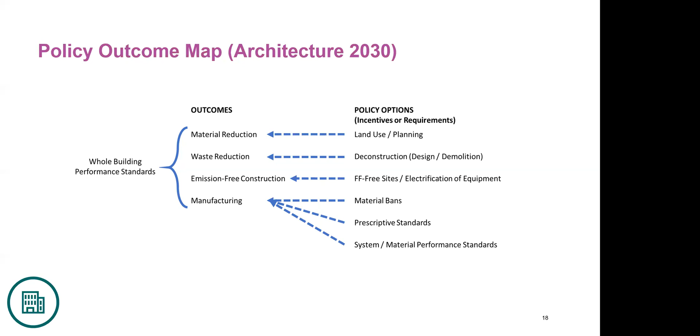And so these were basically the discussions happening on day one. And the morning of day two, Vince Martinez from Architecture 2030, who was there, had sketched out a policy map that listed, as you can see here, all the policy options that we had been discussing on the previous day, what kind of outcomes you can expect from different types of policies, and in the end, how they can all move towards a whole building performance standard. And I'm not going to go through this figure right now, and instead encourage you to look at it, and feel free to send any questions my way that you have on them.

We also had breakout discussions, because this is always crucial in the workshops that we do, so that the cities can actually discuss the issues that they are facing. So we had one session where we tried to look far ahead. So in the next 2 to 3 years, what can you accomplish? And what do we actually want to see be the end result in 10 years from now?

And then we sort of tightened the time horizon and said, okay, but to get to the next 2 or 3 years, or to get to that end target in 10 years, what can you do, what are your next steps for the next half year up to next 2 years to go citywide? Again, that means a lot of stakeholder mapping. Who do you need to involve in this work? And again, listing what you actually need to get it done.

We also had one group that we just called Vision 2050 that were discussing what it would actually take to get to zero. And in that group, there were more conversations around adaptive challenges. So is there a way that we can use the built environment that we have today in a different way than what we are using it today, to as much as possible avoid constructing new buildings?

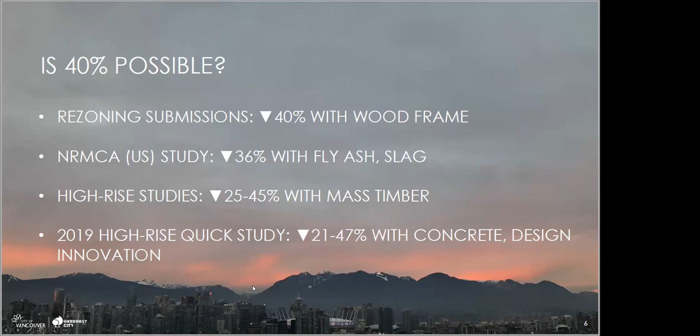Many assumptions go into these analyses, but these are some data points that give us a sense that 40% is possible today. We don't know what that costs, but that's what we need to find out. And so I won't go through this. There are other benefits, of course, co-benefits to reducing embodied emissions. And what do we do next? So as I mentioned, we know it's possible, but we don't know what it costs.

And so we need to set a target in our next rezoning policy that will come into effect 2021. We don't know what that target should be, whether it should be, say, a 5%, a 10%, 15% reduction. We don't know what prescriptive requirements should also sit alongside that whole building requirement, whether to protect sustainable sourcing or to protect against some of the more problematic material choices that you could be driven to, or even just, yes, you can meet your whole building target with some very carbon intensive materials, but why do that if they're not necessary? So maybe we can protect against some of those things.

So all to say, our next step is to do a study with industry on what that cost curve looks like to reducing embodied carbon. That'll allow us to go to our stakeholders and consult on the next step and say, you know, this is what it costs, this is what it doesn't cost, these are the barriers, this is what we're thinking for a first target.

And of course, we're also working to follow our provincial lead here and enable mass timber construction at a higher, up to 12 stories, and possibly some other measures as well that can kind of support or unlock the ability to build out of mass timber.

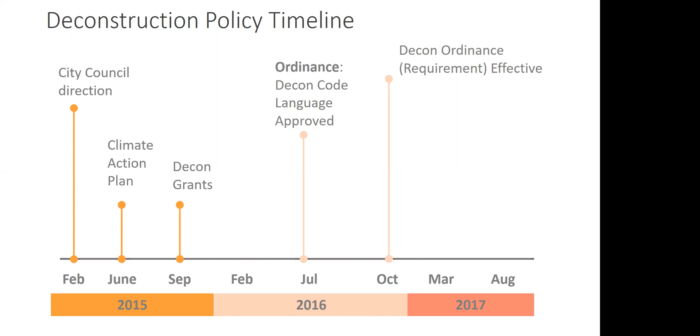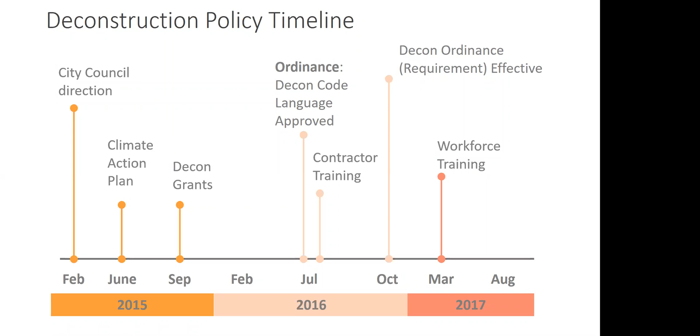In July 2016, Portland passed an ordinance to require deconstruction, and the policy went into effect just 3 months later in October of 2016. Now, this policy didn't just pop up out of the blue. You know, the city had been working on building capacity towards it for years. In 2015, City Council provided direction that they wanted to see this happen. They then integrated this action into their climate action plan at the city level and started giving grants to help incentivize projects. Along the way, the city and other partners like Oregon DEQ supported workforce development to help ensure that the policy would actually be effective when implemented. Now, the ordinance itself says that deconstruction is required if the structure is a detached home or duplex built in 1916 or earlier, or is a designated historic resource.

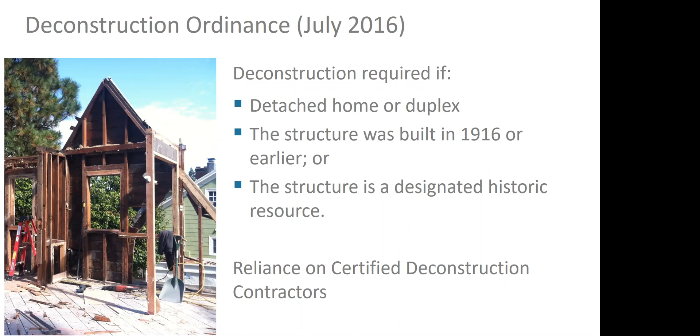The threshold of 1916 or earlier was chosen because it represents about 1/3 of all house demolitions in Portland in the years leading up to the ordinance. This was a significant portion of overall house and duplex demolitions. However, it was right-sized in terms of what the industry could successfully take on. Too little, and we're not really advancing the industry. Too much, and we overwhelm the industry.

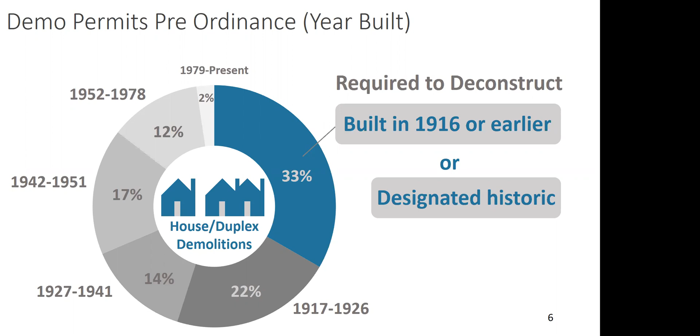So let's talk about the outcomes of this policy. Ensuring we had enough companies and trained and certified workers to do the work was really critical for the launch. So there were a bunch of different trainings offered to get people ready to enter the workforce. And the workforce trainings prioritized participation by women, people of color, and other disadvantaged groups.

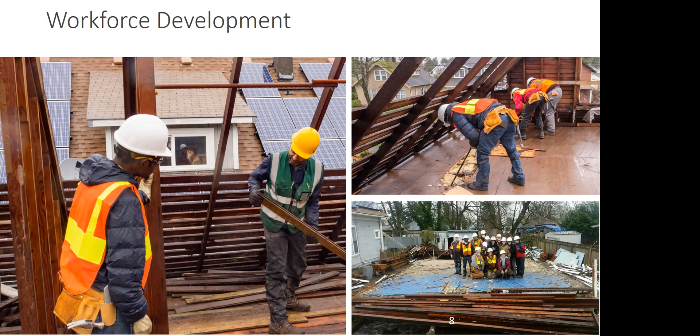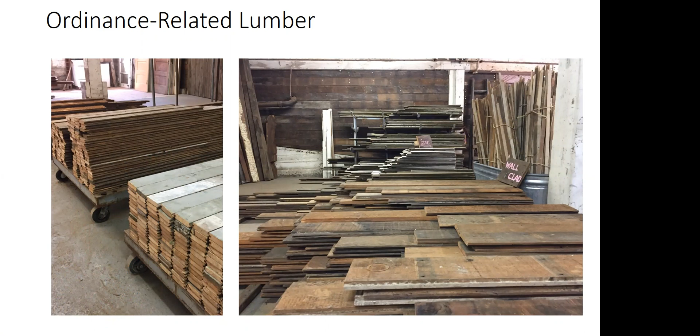Once homes were being deconstructed, a lot of wood hit the local market. And in some cases, there was really more supply than there was demand for the wood. So, because of this dynamic, Portland started looking at other outlets for the salvaged lumber. And one of those outlets was cross-laminated timber panels.

Oregon State University right now is conducting research on the potential to use salvaged lumber in CLT panels. Using a variety of lumber from different projects in the Portland area, they're now conducting strength testing and grading on the 2x4s and also assembling a CLT panel for testing as well.

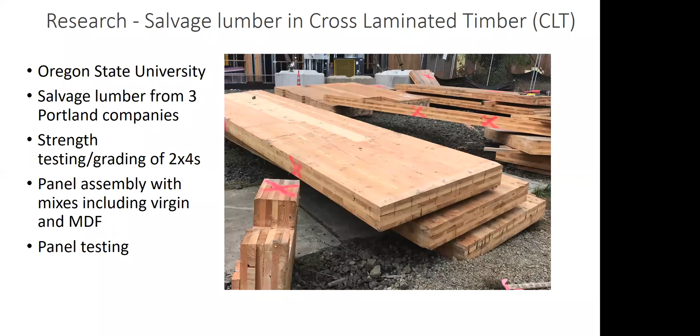The other piece of research I wanted to highlight is a carbon and energy evaluation that we at Oregon DEQ conducted for the city. The main goal of this study was to understand the carbon benefits of the city's deconstruction policy. In this study, we looked at the first 36 homes that passed through the deconstruction program and took a really detailed inventory of all the materials they salvaged and hauled off-site in a drop box.

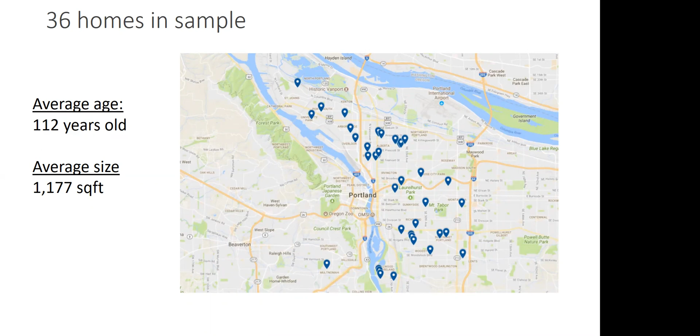We quantified the impacts of each deconstruction project, and then we modeled the project as if it were being mechanically demolished, with all the materials being hauled off-site in just a drop box with nothing being salvaged. And then we basically compared the two scenarios to understand the impacts of deconstruction versus mechanical demolition.

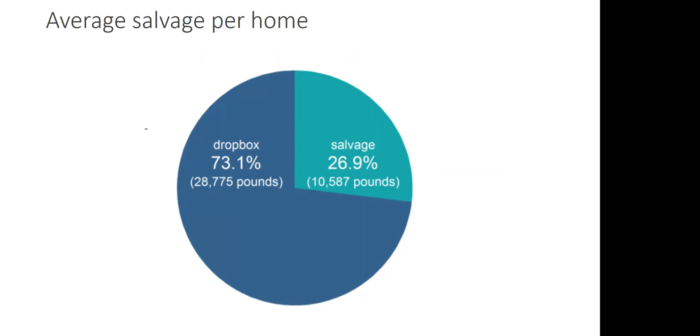Results show that the average home deconstructed in Portland yields about 10,000 pounds of material, which is approximately 27% of the total house weight, which does exclude the foundation. And we can see here in this chart that the average home salvage material was really dominated by softwood lumber. That's all the material we were looking at. A little bit of plywood showed a blip on the screen there as well.

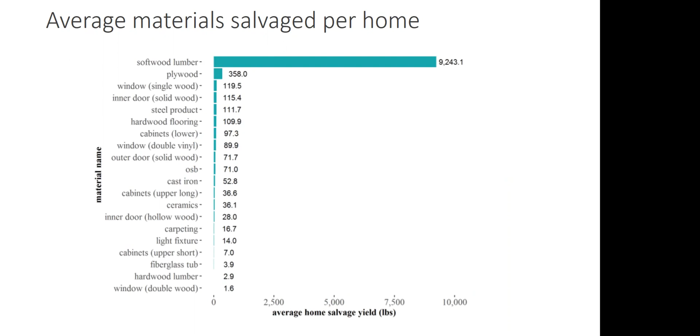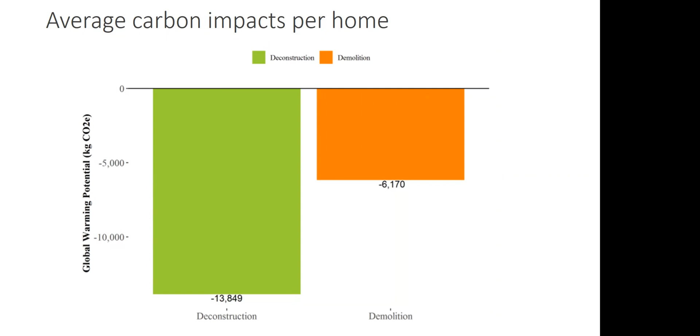And here's the average carbon benefit of deconstructing a home in Portland versus mechanically demolishing it. We found that on average, deconstruction of residential homes in Portland had double the carbon benefits of a mechanical demolition. Now, the net benefit between these scenarios equates to roughly 1.6 cars taken off the road for 1 year for each home being deconstructed.

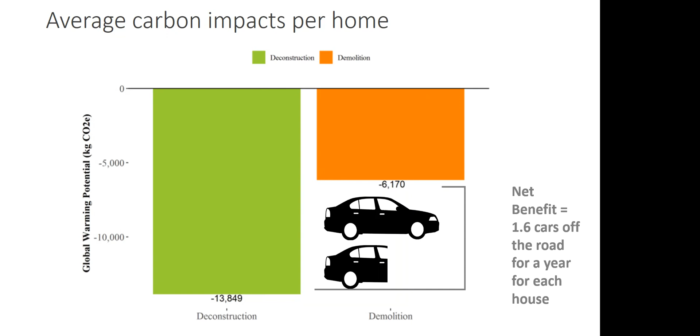When we break the carbon impacts down by activity, we found that the materials really dominated the impacts. Material transport, worker transport, and equipment use were really inconsequential. So it's really all about the materials here. It's really about the embodied carbon in those materials.

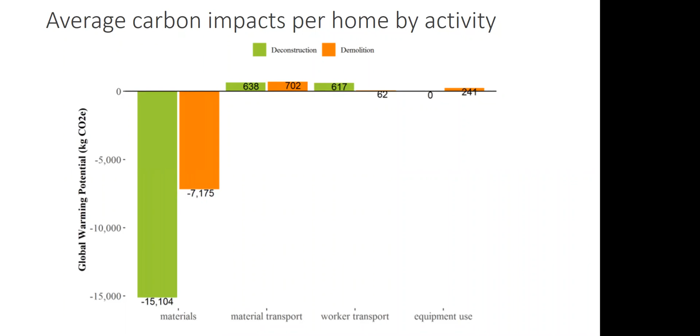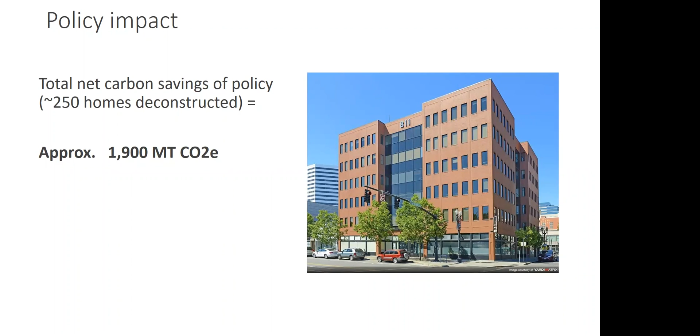Finally, when we look at the policy as a whole, there's been approximately 250 homes deconstructed since the policy took effect in 2016. And based on this research, the net carbon benefit of the policy is roughly equivalent to offsetting the new construction embodied impact of roughly a 50,000 square foot commercial building. So at the end of the day, the analysis shows that deconstruction does have clear environmental benefits. And we hope this is useful to others considering a deconstruction policy, because we're certainly going to use this information to promote deconstruction in other cities around Oregon.

The next policy I'm going to be discussing is the City of Portland's concrete EPD purchasing policy. Just about 3 weeks ago, the City of Portland passed the first policy in North America to require EPDs for all city purchases of concrete. They will require the EPDs starting January 1st, 2020, and then establish a global warming potential threshold by April 1st, 2021.

And they'll set this threshold by collecting EPDs on projects for about a year, and then using a variety of information sources to set a threshold that really strives for carbon reductions on city projects. And then by January 1, 2022, all concrete EPDs submitted to city projects will need to have a global warming potential below whatever that threshold is set at.

And so at this point, you can probably tell that this policy is essentially like a Buy Clean California policy, but it's local to Portland and exclusively focused on concrete. And so we're really excited to continue working with Portland to help make this policy successful. You might be wondering why Portland is focusing on concrete versus all the other materials we heard about, for instance, during Catherine's presentation on Buy Clean California.

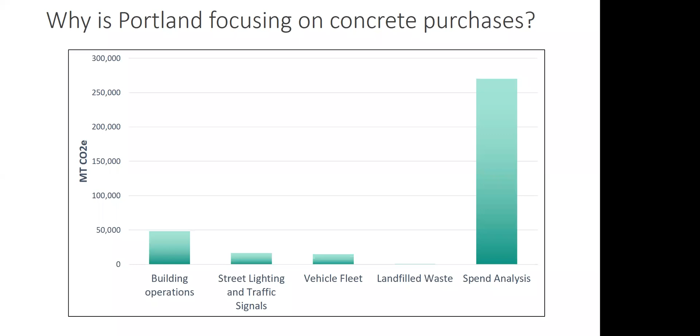So once Portland figured out that their spending was the real target, they decided to look deeper into their spending and conducted a supply chain analysis. Now, results of the supply chain analysis showed that construction services dominated their supply chain emissions. And when you look deeper into those emissions, you find that concrete is a major source of emissions to that category. Again, here, I want to point out that this isn't particularly unique, and a lot of cities will likely find something similar when they do their own emissions inventories.

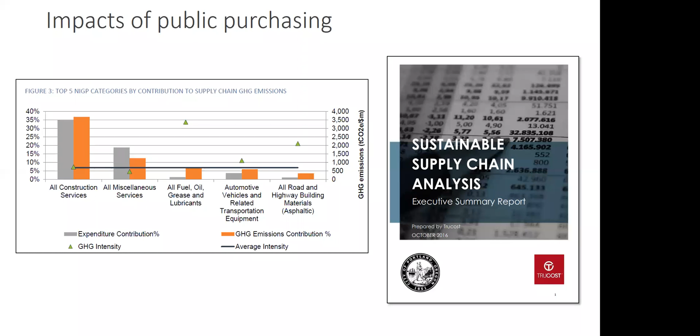So after the supply chain analysis, Portland then developed a sustainable procurement policy, where they specifically identified the use of EPDs as a purchasing tool. At the same time the same sustainable purchasing policy was passed, the program that I run, Oregon DEQ's voluntary concrete EPD program, was really starting to show some results. By early 2019, we had about 1,500 EPDs published from 7 different plants across the Portland metro area. So as you can see, there's quite a few pieces of the puzzle that had fallen into place that gave Portland the ability to pass this precedent-setting policy for concrete.

Finally, I would be remiss if I didn't mention a critical piece of passing this policy was the direct support from Oregon concrete producers. We've established a real positive working relationship with them, and it resulted in the local producers providing support and very constructive feedback on the policy itself.

All right, so I'm going to quickly highlight a City of Portland zoning policy that I think is worth mentioning. Under the city's residential infill policy, which is being developed right now, there's a dramatic shift away from single dwelling housing units for Portland. And one aspect of this policy is a limit on house size. And that has a direct and immediate effect on embodied carbon. In exchange for a house size limit, the city's proposing that more flexibility be given within that limit to build duplexes and triplexes in zones that would traditionally only allow a single unit.

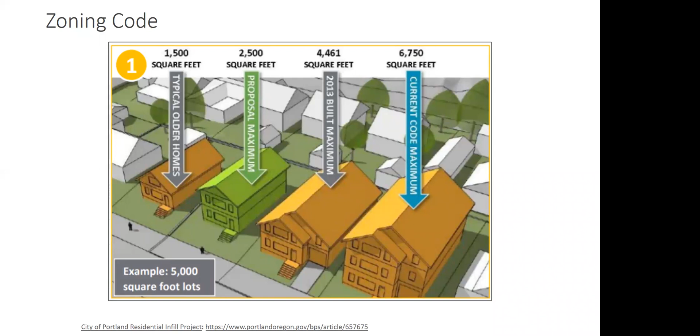Last but not least is an upcoming policy for the state of Oregon. A 2017 executive order requires that newly constructed state buildings consider reduction strategies for reducing embodied carbon. And so we're just starting to discuss our approach to this policy, and I'm excited to start working on state buildings.

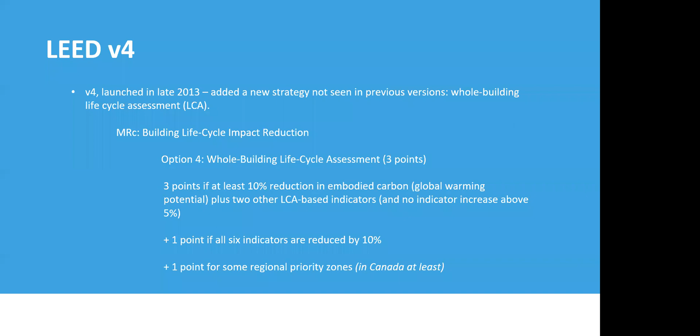There's also an additional 4th point available if you can reduce all 6 indicators by 10%. And in some areas, you can get an additional point up to a 5th point for a regional priority. I know that's the case in Canada. I'm not sure about the US, but I think that's the same in the US as well.

How much is this going to cost us? Will we have to change the design to meet the credit requirements? And how much of the design are we going to have to change? How much is that going to cost? None of those answers were really available until you would do the analysis. So you were committed to spending a not insignificant amount of money to do an LCA analysis on the project without having any clear idea of what the results would be and if you were able to get the credit. So it was a bit of a barrier to entry for the way that the credit was originally designed.

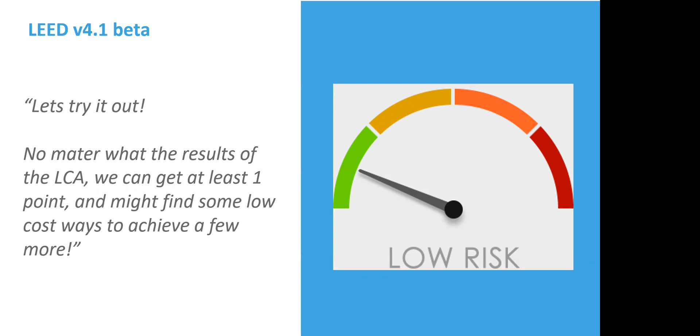So this is kind of how I like to think of version 4 versus version 4.1 in terms of their response to embodied carbon in life cycle assessment. They're both doable and winnable, but version 4.1 I like to think of as a much safer space. So that's the update on LEED.

Quickly to touch on the Zero Carbon Building Standard, which was launched by the Canada Green Building Council in May of 2017 as a pilot. The pilot required all projects as a prerequisite, which is different from LEED because, as you know, in LEED the LCA point is just one option of many that people can perform. So many LEED projects wouldn't even have looked at LCA. But in the Zero Carbon Building Standard, it was a requirement.

You had to calculate and report your embodied carbon. There was no requirement in terms of performance levels. So you didn't have to be below a certain threshold, for example, but you at least had to calculate it. And that was a great first step to push the Canadian market. The pilot actually just finished, and the CAGBC is now developing the next full version of the standard. I'm actually on the steering committee of the standard, so help to guide the approach to embodied carbon going forward. And I can let you know what is currently being proposed.

It's pending final approval, but we are now proposing to include embodied carbon in the zero carbon balance that is required for the building. So it's no longer okay to kind of zero out your operational energy, which is what we were doing before, and then just report your embodied carbon. You have to actually have the embodied carbon be part of your zero carbon balance now, which is obviously a big improvement. And then the other important aspect that we changed was we're saying only new materials need to be included in the life cycle assessment and the embodied carbon calculation.

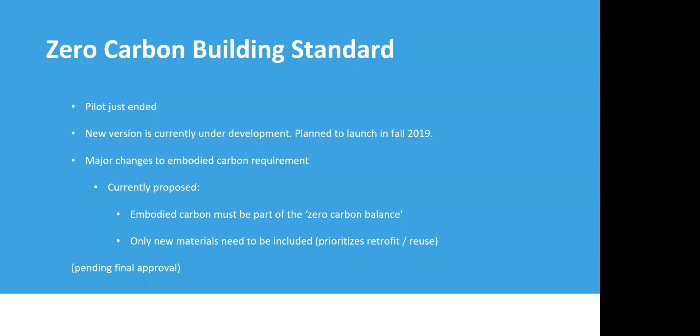And we're using this as a way to prioritize retrofits and reuse. So any materials that aren't new, that are being retrofitted or reused, they obviously are excluded from that zero carbon balance. So as I said, those are still pending final approval, but that's the direction that the standard is going in. And we think it's a big change.